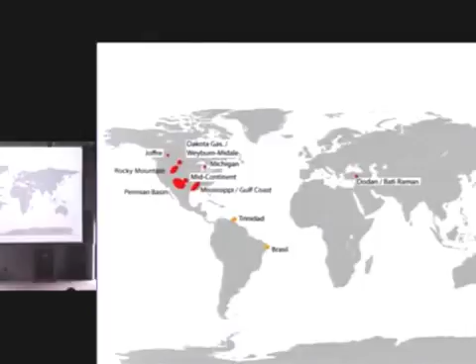You know that when you drill a well in the United States, most people are hoping to strike a few things. You're hoping to strike oil. Here in Pennsylvania, where I'm from, we're in the middle of the Marcellus Shale region, so people are hoping they have natural gas under there, or you might drill wells for water. But there are a few places in the United States that have not just reservoirs of natural CO2, but prolific reservoirs of natural CO2. In fact, in the world, the United States and North America in general has this uncharacteristically large amount of natural CO2.

Most of the reservoirs are surprisingly high in purity. Some of them, such as in LaBarge, are very low purity, but utterly massive in the amount. And because of that, there's a great amount of interest in what to do with all that CO2.

Well, in the United States, we also have a large amount of crude oil. We've been working fields containing underground layers of sandstone or carbonate for decades, primarily in places like West Texas and the Permian Basin, where there are, several thousand feet below the ground, a great deal of crude oil reserves.

And the first way that you try to get this out is by the natural pressure, just from the pressure of the formation and some of the gas that's dissolved in the oil. When you depressurize at the production wells, you get the natural forces to produce it. And then after that, you can inject water into these formations. This can go on for decades - 10, 20, 30, 40, 50 years of water flooding.

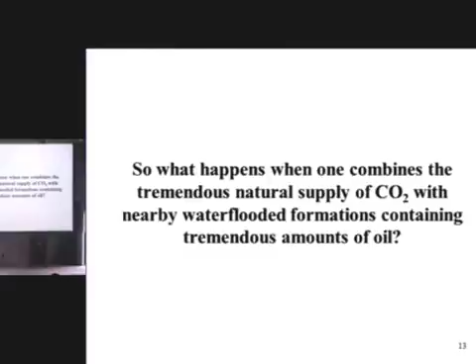There are also, especially in West Texas, large sources. Now, it's called anthropogenic CO2, but just to make it clear, this is actually CO2 from an underground reservoir.

So it's actually made by nature, but it's in a methane-rich fluid. They process natural gas to sell methane, and CO2 is a byproduct. They used to vent the CO2, but some of these gas plants actually now sell it into pipelines.

This is one of the most prosperous and growing areas of the country right now for CO2 enhanced oil recovery. You have the Jackson Dome supply of CO2, supplying CO2 enhanced oil recovery fields in the southeastern part of the United States.

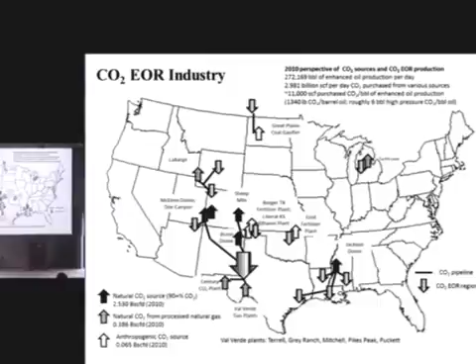Typically, you're told not to put up a lot of text on slides, but you have to violate it once in a while. Some of these numbers, I think, are really important to gain a perspective of this.

Of the 7.6 million barrels of oil produced in this country, about 4% of it, or 285,000, comes from CO2 enhanced oil recovery. 3 billion standard cubic feet of CO2 are injected into the ground every day.

About 11,000 standard cubic feet of CO2 are injected to produce a barrel of oil. If you burn a barrel of oil, it releases 8,000 standard cubic feet. Another way to think about it, 175,000 tons of CO2.

This is the one that really gets everyone's attention. It actually takes 4 or 5 barrels of liquid CO2 to get 1 barrel of oil out. And believe me, the oil companies don't like this. They don't want to use 11,000 standard cubic feet to get out 1 barrel of oil.

Right now, some of them promote that because it makes it look like it actually sequesters more CO2, since you're injecting this much to get out a barrel that releases this much. But believe me, they would like this number to be much, much smaller.

It's a lot of CO2. There's over 3,000 miles of CO2 pipelines in this country. And only 15% of the oil in place is recovered by this process.

Coal-fired power plants emit roughly 30 times as much CO2 as is used by all the CO2 for enhanced oil recovery. And yet only an incredibly small fraction of truly anthropogenic CO2 is used for EOR.

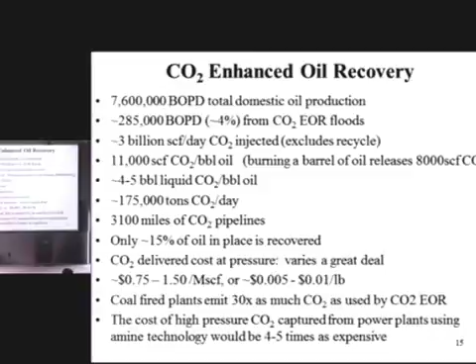So CO2 is doing so well. If there's this big infrastructure with all these sources and nearly 300,000 barrels of oil a day and all of these jobs, then what's the problem? There's a profound problem.

Almost every one of these CO2 enhanced oil recovery fields has major problems getting oil out of the ground. Even though they're economic, they want to be, and they can be, much, much more economic. This is the primary killer for enhanced oil recovery.

The viscosity of CO2 in centipoise, which is the same as millipascal seconds, is roughly 0.05 at enhanced oil recovery conditions. This is temperature, and these are lines of constant pressure. This is about EOR conditions. That means CO2 is roughly 20 times thinner than water.

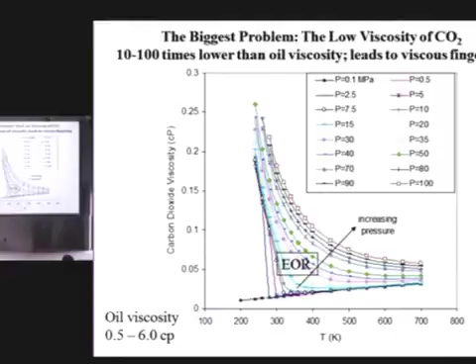And oil viscosity in fields where CO2 is applied ranges from 0.5 to about 5 or 6 centipoise. That means the CO2 is 10 to 100 times thinner than the oil being recovered. And that leads to profound and prolific problems.

So the low viscosity of CO2 increases the mobility ratio. You know, every time you run an equation on a slide, you lose half the audience, right? I think this is my only equation, so please don't be discouraged, and the half of you that just drifted off, please hang in there.

So the mobility ratio looks like this: this is the viscosity of CO2, this is the viscosity of oil. Upstairs, we have the relative permeability of CO2 — if you're not familiar with that term, it's a measure of how easy it is for the fluid to move through the rock. Downstairs, we have the relative permeability of oil. We want the CO2 to be less mobile than the oil, so we want this mobility ratio to be 1 or less — we want it to be small. So back to grade school: how do you make this small? Well, you could make the numerator small, or you could make the denominator big, or you could make the entire thing small. That's all it comes down to.

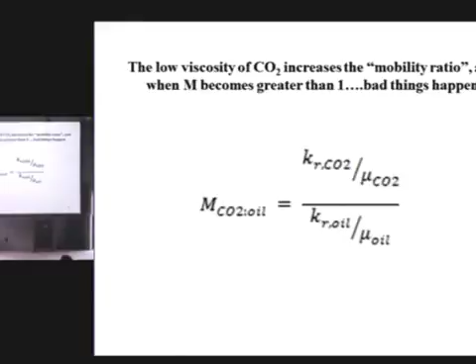The most profound challenge facing CO2 enhanced oil recovery is: can you make the relative permeability smaller? Can you make the viscosity of CO2 bigger? Or can you make this entire lumped term smaller? There's not too much you can do about the oil itself because it's down there in the rock, so you're not going to make much progress attacking that.

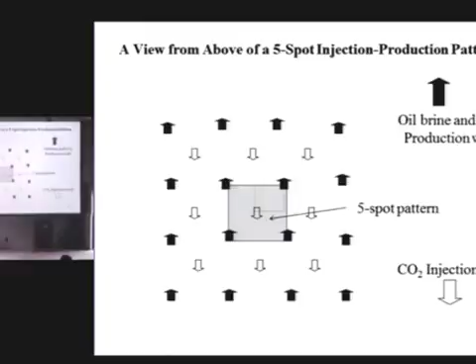So now let's pretend we're in a helicopter flying over West Texas. There are a bunch of wells in this beautiful pattern called a 5-spot pattern. The arrows pointing down are where they inject CO2, and the arrows pointing up are where they produce CO2, oil, and brine. So this is the 5-spot pattern, and what we are particularly interested in is the repeating representative unit of that 5-spot — in essence, a symmetric little pattern.

On this diagram, which is about 50 years old but still conveys the message beautifully, this is the problem — again, we're viewing from above. This is about what happens in most fields right now when you do CO2 enhanced oil recovery. Here's the injection well, where they're injecting CO2; this is that representative pattern, and this is the production well. The CO2 fingers through. This is a snapshot of where the CO2 has progressed when it first breaks through, or when it first starts to flow into the production well.

This is a mobility ratio of 71 — that means the CO2 is roughly 70 times less viscous than the oil, a number that occurs in oil fields today. Do you see this gray area? CO2 is doing a great job getting the oil from that gray area; it's a good solvent because it develops miscibility. The problem is that it hasn't even touched these white areas. So what they need to do is take the CO2 that comes out, re-inject it with new CO2, and just continue to flood this for decades and decades — 10, 20, 30, 40, 50 years.

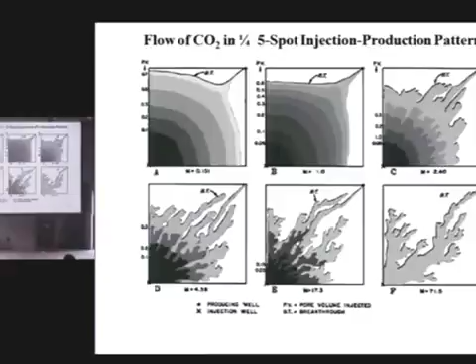Now, if we could make the CO2 less mobile — make it thicker so its viscosity matches the oil's — then this is how the CO2 would flow through the sandstone or carbonate rock. Do you see how smooth and uniform it is? It's just marching through the formation and sweeping it out. If you could go from here to here, it would have an absolutely dramatic, profound, transformational effect. So how can we do that? How can we do that?

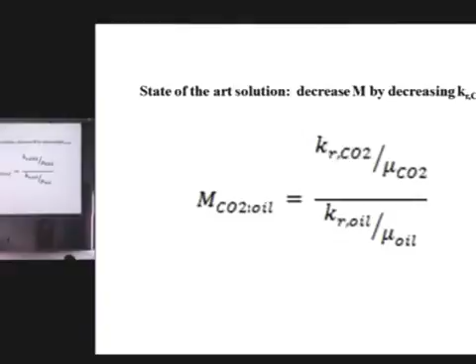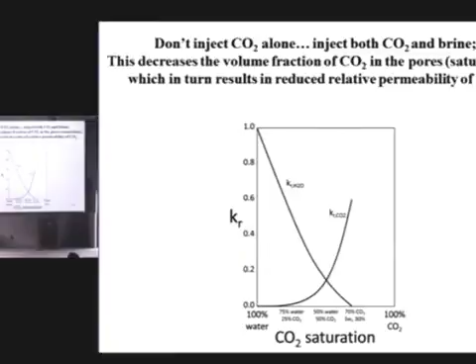But what's the price you pay? You're injecting all this stinking water. They don't want to be injecting water into these wells, they want to be injecting the good solvent. So you're injecting water, you're producing water. It's a nightmare of an operational problem, but it's the best idea they have.

I don't know who has more acronyms, government facilities or the oil industry. It's a really close competition. So what I know about the oil industry, the acronyms are much less accurate.

For instance, they call this WAG. It's water, but it's never water, it's always brine, they never do this with fresh water. And they inject it alternately with gas—it's really not gas, it's supercritical CO2. But WAG just sounds so cool that it's called the WAG process. Everybody loves WAG. WAG is the way to go.

It makes things profitable. The Republicans love it because it produces oil and generates jobs, and the president loves it because it sequesters CO2, even though most of it is natural. Well, we'll forget about that for a while. But it's a clear demonstration that you could sequester CO2. So it's a great technology.

It's thriving. This is how it's done: you inject the CO2, you inject it alternately with brine, you develop a miscible zone that pushes a lot of oil out. And coming out, you have three things. You have oil—it goes into a big tank, you separate it by density, and you sell that.

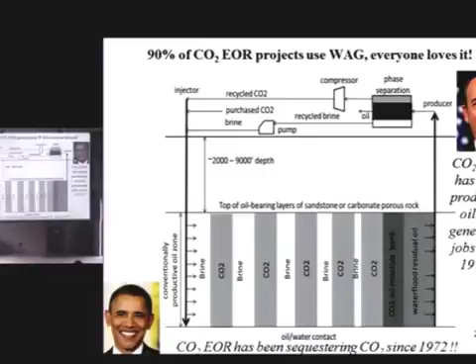You have brine—you just recycle that and re-inject it. And then you have CO2, actually some other gases in there too, but let's just say it's CO2. It gets recompressed and recycled with brand new CO2. That's how the process works.

Even though that process works very well economically—they make profits, it's a thriving industry—it could do so much better. It could do so much better.

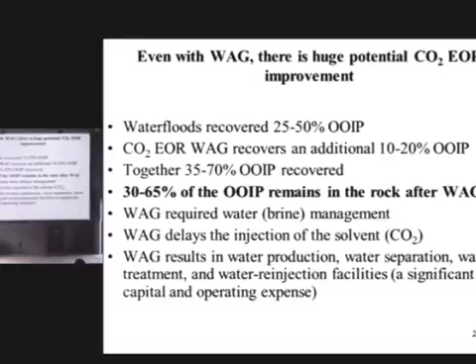After primary floods, water flooding, and even CO2 enhanced oil recovery, CO2 flooding only gets 10 to 15 or 20% at most of the original oil in place. Even after primary recovery, water flooding, and CO2 flooding, you still have one-third to two-thirds of the oil still remaining there, sitting in the rock.

It's so frustrating, and WAG is not the ideal solution. It requires massive water management. When you go to these oil fields, there are people whose whole lives are nothing but managing water—water coming out of wells, they have to treat it a little, redistribute it, re-inject it, separate it in separation wells.

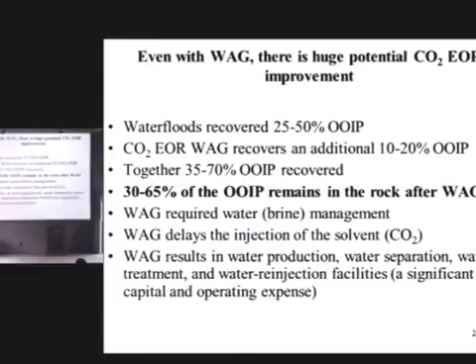WAG delays the injection of the solvent. You're injecting months of water, and the water isn't a solvent at all. And you have a whole bunch of facilities dedicated to it.

This is where one of our research areas comes in. We're trying to thicken CO2, to make it just as viscous as the oil being recovered. If we could do that, I believe we could easily double or triple the oil production rate coming from these enhanced oil recovery projects. That is our goal, and it is really, really difficult.

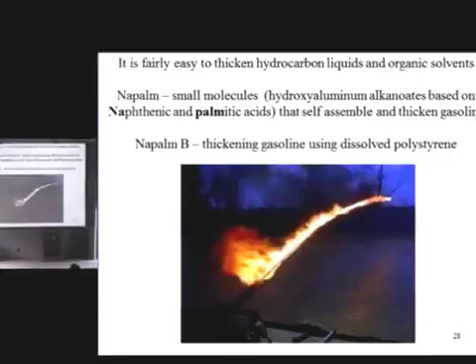This is a picture of a thickened hydrocarbon fluid—napalm, which was weaponized gasoline. When napalm was invented, they tried to thicken it, first with tiny molecules that self-assembled into rod-like macromolecules in solution. It gets its name from naphthenic and palmitic acids—actually the hydroxyaluminum alkanoates of these acids—taking the 'na' and the 'palm' to make napalm.

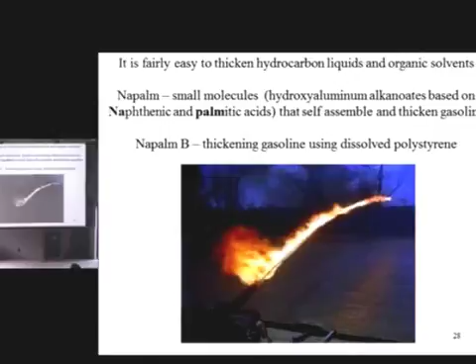After polymers hit their stride, you could simply take polystyrene—a styrofoam cup—put it in gasoline, stir it around, heat it up a little to make it go more quickly, and thicken it. This tells you there are two ways to thicken fluids: either really, really big molecules, or teeny tiny molecules that self-assemble and form long viscosity-enhancing macromolecules.

This is what we're trying to do to CO2. We're trying to make a beautiful, transparent, thermodynamically stable, viscous solution where the CO2 viscosity is the same as the oil. If you read the literature on thickening things, we do not want to make a milky white or opaque gel. This gel is actually a bunch of micron-scale fibers interlocked with the solvent in the pores. That will not flow through a rock.

This can flow through a rock. This cannot. What will happen if you inject this into a piece of sandstone or carbonate rock, the rock will filter out all these fibers. They'll just get stuck on the face of the rock, and it won't work at all.

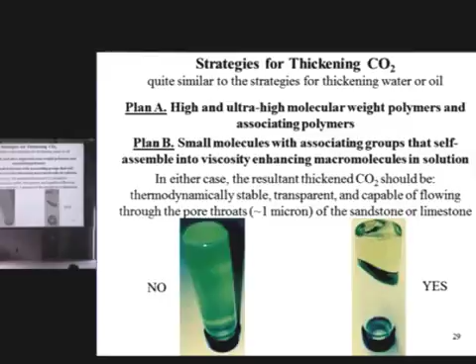So our challenge is a little bit harder than people that make gels in vials, because we have to get whatever viscous solution or gel that we form to flow through a piece of sandstone or limestone.

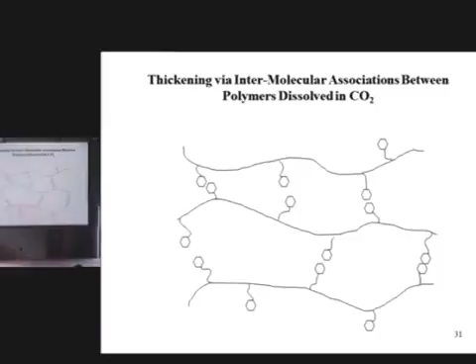We had some success with polymers. Our idea was to make a polymer with CO2-loving parts and associating parts, so that if we got these polymers to go into solution, not only would they start out with a high molecular weight, but these associations with CO2-phobic groups would make a large viscosity-enhancing macromolecule. We were successful. We made the only CO2 thickener that's been identified yet.

It's a copolymer. This monomer is a fluoroacrylate, the most CO2-loving monomer there is. This is styrene. This doesn't like CO2, but it likes to associate through pi-pi stacking because there's a different electron density on the periphery of the benzene ring than there is in the core of the benzene ring. So they sort of stack like this.

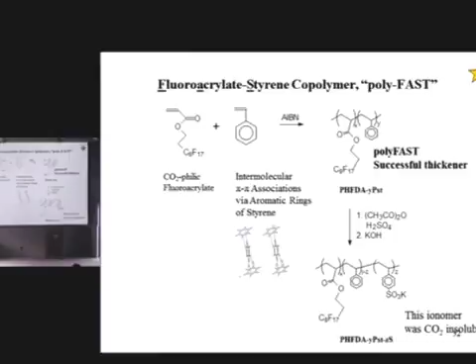When you put this into CO2, you can adjust the CO2 viscosity to the oil viscosity with less than a weight percent. But it's too expensive. Fluoroacrylates cost roughly $50 a pound. We're trying to make a thickener that costs $3, $4, $5, $6 a pound.

So we then tried to make a CO2 thickener using polymers, and we weren't alone. In the early 1990s, there were a whole bunch of groups, mainly interested in chemical engineering applications, studying how CO2 interacted with different chemical functional groups to see which ones were CO2 philic and which ones were CO2 phobic—CO2 loving or CO2 hating.

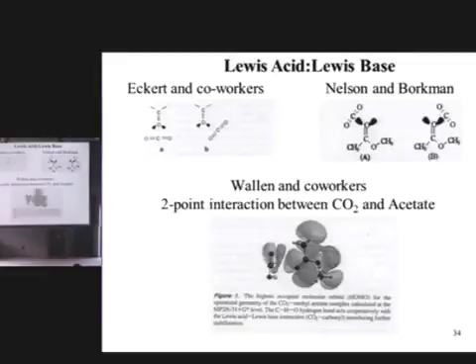What people started noting, even though this is a very simple diagram, it sort of makes the point: the carbon in CO2, even though this is a nonpolar molecule, has a quadrupole moment. Basically what that means is the C is a little bit positive and the oxygens are a little bit negative. So if you have a carbonyl group here, there's a lot of electrons here. This oxygen's a little bit negative, and it likes to hang out with this C, which is a little bit positive. Those kinds of Lewis acid, Lewis base interactions were shown to work.

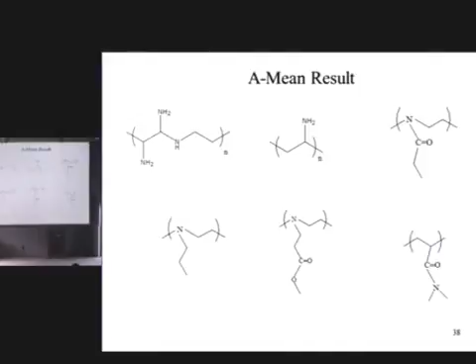So what we started doing was making polymers, and you'll see in the following slides, we have a bunch of polymers. We spent years making polymers—polymers of all sorts of configurations, polymers with all sorts of oxygen, polymers with all sorts of amines, because amines might interact with CO2, polymers with oxygens on the side chain. Everything. It was so frustrating.

Those 4 slides were about 4 years of my life, and that's why I went through them. I'm still in counseling over those. It was one of the most frustrating streaks of research that we ever did.

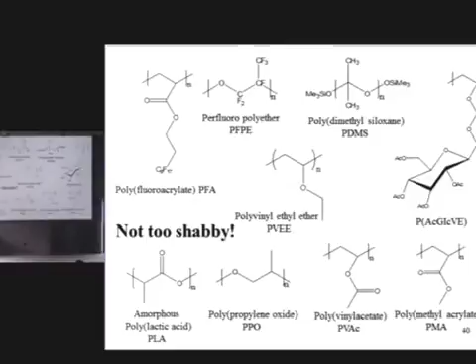This is fluorinated ether. That's not going to work out—this is extraordinarily expensive to make. This is a sugar acetate on the side chain of a polymer. Here's amorphous polylactic acid; that dissolves in CO2. And polyvinyl acetate, polymethyl acrylate.

But you have to be careful. These things are soluble, but they're not that soluble. You need tens of thousands of psi. Oil field operations are nowhere near that. When they do enhanced oil recovery, the pressures are typically 1,500 psi to about 4,500 psi. Every polymer I just showed you requires about 9 to 10,000 or more. With the exception of those expensive fluoroacrylates, all the affordable ones have pressures way, way above oil field pressures.

I'm an experimentalist, and I'm sort of proud of it. And I had to almost go crying to my molecular modeling friend, Karl Johnson at University of Pittsburgh, and apologize for all the cruel things I said about molecular modeling people for decades. I just begged him for help.

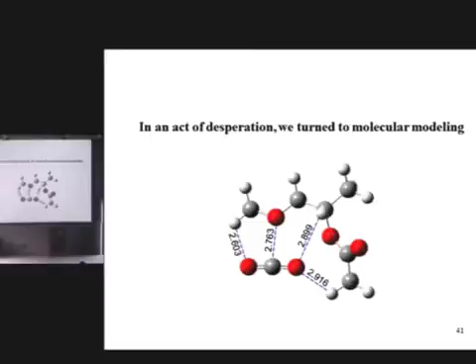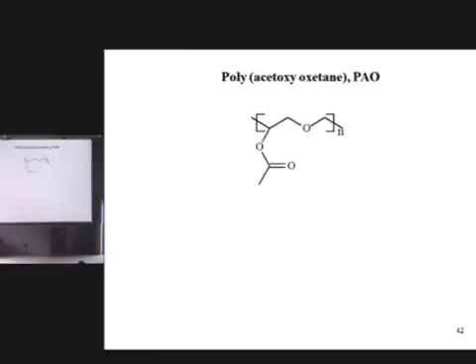I said, there's got to be a CO2 soluble polymer that doesn't have fluorine in it that you could help us make. Well, Karl found out that this polymer, which no one had ever made, actually has more - modeling people also make the best slides. Karl made this slide for me. I like modeling people now.

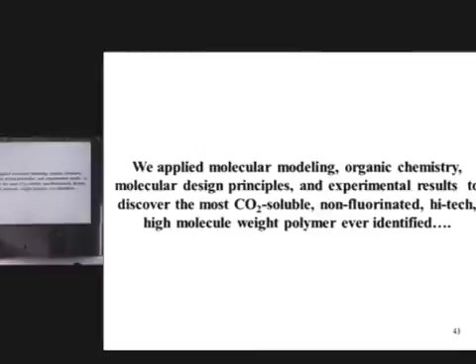Basically what Karl did was he would measure the strength of the interactions and the configurations using ab initio methods, and we found out that this unfortunately wasn't as good as some of the others, and we're still not sure why.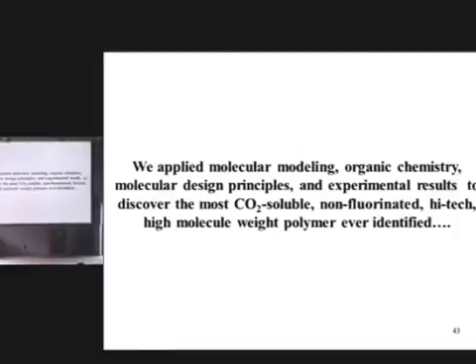So in summary, what I'm about to show you is one slide where we identified, after 6 years of funded work, what the most CO2 soluble, CO2 loving, high-tech, fancy pants polymer that didn't contain fluorine is. And it's Elmer's glue. It's polyvinyl acetate.

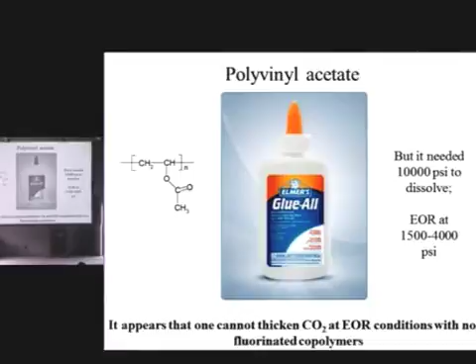It's a $3.50 per pound commodity chemical, and at the end of the day, there is no high molecular weight polymer that's more soluble in CO2 than polyvinyl acetate, but you need about 10,000 psi to dissolve it. So that's way above enhanced oil recovery conditions.

So having exhausted ourselves and the patience of our funding agency, we went to plan B. Every good engineer has a backup plan, and we had an exquisite backup plan. We gave up on polymers, and we turned to those little molecules, the teeny tiny molecules that self-assemble, such as napalm, the example that I gave you for thickening gasoline.

Every small molecule that thickens something, whether we're talking about the thickeners for turning oil into the grease in your garage door, as an example, they all have a part that likes the solvent, so they need to have a CO2 philic segment, and then they have to have a CO2 phobic segment that likes to associate.

Well, from these previous 6 years, we were experts on things that love CO2. So we knew about CO2 philic things, and CO2 phobic things we took from the industry. These are the ideal things that we would like to have for these small molecule thickeners.

Just to give you a ballpark idea, remember we're paying 20 bucks a ton for CO2. So we want to get a thickener that works at about 0.05 weight percent - that's about 1 pound per ton. If CO2 costs $20 a ton and this thickener costs $5, they'd be willing to pay $25 per ton of thickened CO2 if it was as viscous as we're trying to get it.

This is what's really hard. I don't know how many of you have ever made gels with small molecules, but what you typically do is you put the powder in the solvent, and then you have to heat it up to break those bonds and let it dissolve, and then you let it cool to form the gel. It's just like making Jell-O, right?

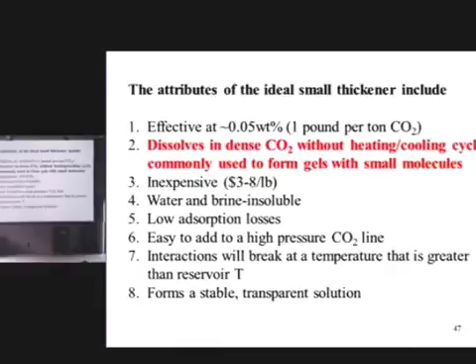So on top of the difficulty of finding a gelling agent, you have to tailor it so you can just stir it without heating it and have it make a gel. That's really hard, and that's what makes this project another thing that makes it so incredibly difficult.

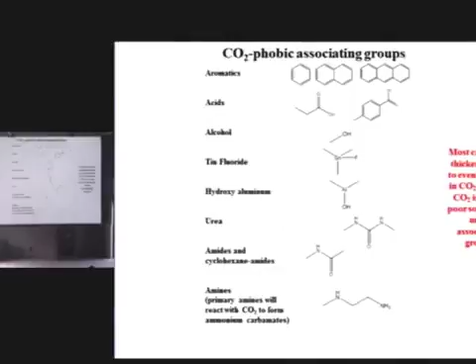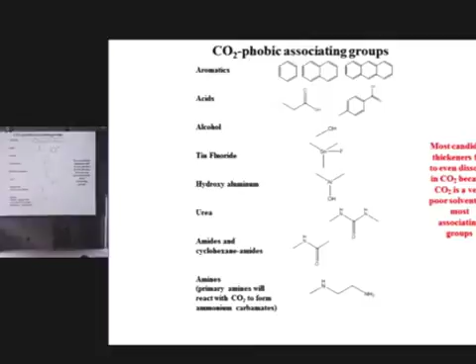Here's the CO2 phobic groups - the same groups I showed you on the previous slide. All we did was look in the literature for things that like to associate. We looked at hundreds of papers of molecules that gel things, and we looked at the features of their structures - these are the chemical groups that like to associate with one another. We took CO2 philic segments and matched them up with CO2 phobic associating groups in different architectures.

We reviewed the literature, and in this cartoon, the stars represent the sticky part. The straight parts represent rigid CO2 philic groups, like short alkyl chains. And the ones that are a little floppy represent things like silicone oil or polypropylene glycols that have a bit more flexibility. There's all these different architectures.

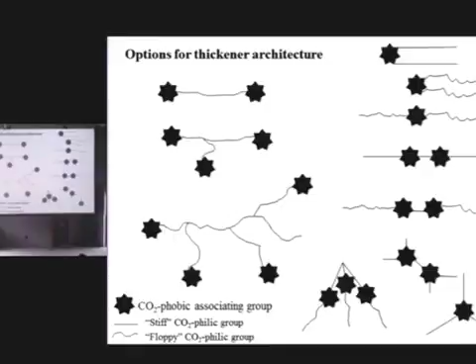So what we're doing right now is exploring all sorts of small molecules. For instance, take a look at these - CO2 phobic, but they associate. This is a short hydrocarbon chain, so those can be CO2 philic. These things thicken hydrocarbons very easily.

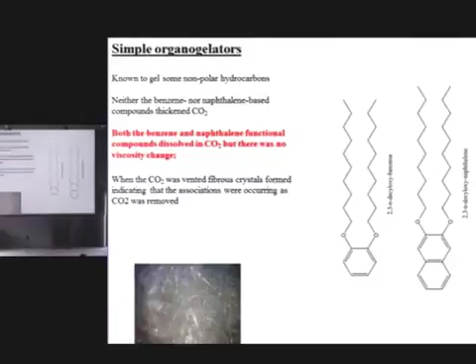In CO2, we found that they were soluble. When they came out of solution - these did go into solution in CO2, but they didn't change the viscosity. When we vented the CO2, they did self-assemble, now that the CO2 was gone, and formed fibers.

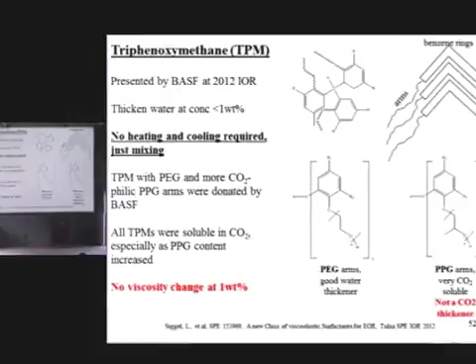So what we did - we worked with BASF, and we took off these polyethylene glycols, which don't like CO2, and we put in polypropylene glycol, which really likes CO2. We got this molecule to dissolve. This was CO2 insoluble before; we did get this to dissolve in CO2, but it didn't self-assemble and thicken.

This is the universal gelator. It's made in Great Britain. They call it universal because this molecule gels more liquids than any other molecule that's ever been made, so they nicknamed it the universal gelator. When I spoke with this person, Dr. Knight in Great Britain, and read his papers - maybe this is why his group doesn't have as many papers as they could.

They were actually gelling wine and beer. I think the graduate students repeated that experiment like 10 times to make sure it worked, but they actually reported gelling wine and different kinds of beers, and also toluene and hexane and things like that. So we made this thing, and it sits like a rock in CO2. So I told him he had to change this to something like galactic universe - CO2 is not in the universe. It sits there like a rock.

These are the associating groups, these 4 hydroxyls. CO2 doesn't have enough solvent strength to dissolve them. We also looked at little molecules - you see this simple little thing here? When I say little, a lot of thickener molecules are teeny tiny, very small.

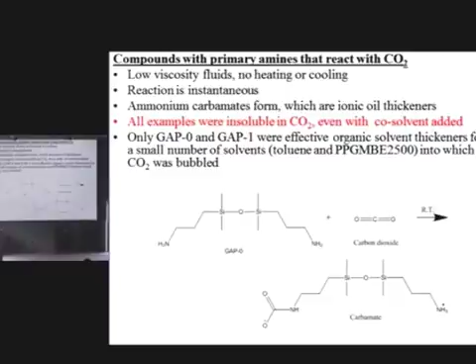This has primary amines. These react with CO2, and you could form an ammonium carbamate - this is positive, this is negative. These molecules can line up in a row. This is an excellent gelator for some organic solvents, but it's utterly insoluble in CO2. CO2 has a real hard time dissolving ionic groups.

So where are we at right now? The polymers - it doesn't look like it's going to happen with polymers. Right now we are 15 months into a 3-year project to find a small molecule thickener for CO2. We're not there yet, and so, since we're such good engineers, we actually came up with a plan C.

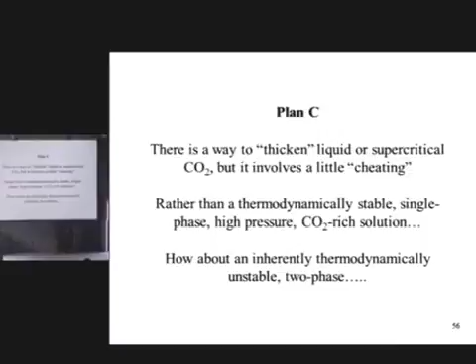So we have a 3rd plan for this one, and that is to make a thermodynamically unstable 2-phase foam. Just think about it - if you go home to the kitchen sink and put soap in your kitchen sink and make these bubbles, this foam, you could sort of consider that to be viscous air. It's like you're scooping up air and holding it in your hand, giving the illusion of it being very viscous.

Now it has its disadvantages, right? If you have a foam in a glass of beer, or if you have a foam in your bathtub or a foam in your sink, you have to do some agitation to make it work.

So somehow you have to agitate these fluids, and then that foam is going to slowly collapse with time. This is not as good a solution as a CO2 thickener, but it's a workable solution.

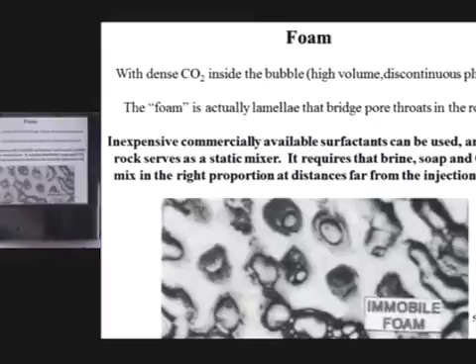This image shows a micron scale porous opening through glass slides. See these bubbles? They're all bubbles of liquid CO2, separated by dark films of water. So what we're going to try to do is actually make CO2 foams in the rock.

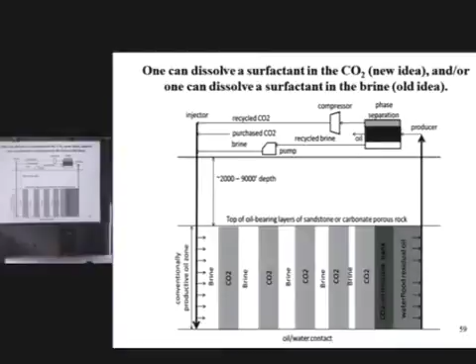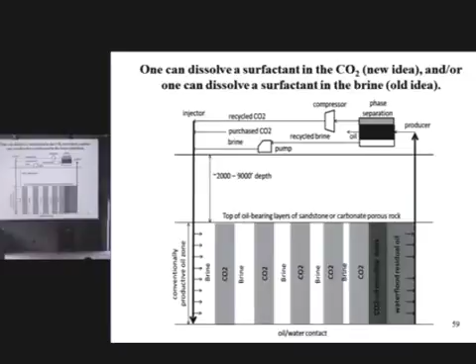Here's the CO2 flood. Remember, right now they inject CO2 and water alternately. So the idea to make a foam is very simple: you put surfactant in the brine, or in the CO2, or in both phases. And what is your mixer? The mixer is actually the rock—the rock is like a static mixer. So you inject soapy water and CO2, or brine and soapy CO2, or put soap in both and see what happens.

You all know this, right? It's easy to put soap into water—we have so many household products. There are thousands of surfactants, but not every surfactant is a great foaming surfactant. This is one of the very best.

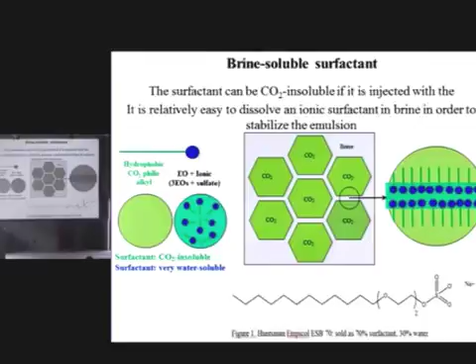This is the one we're actually using in a field trial coming up next month in one of the southern states. It's very soluble in brine, and it goes to the interface and stabilizes it: the water-loving part points out, and the CO2-loving part points in, and you can get some beautiful foams. In both cases, whether it's a CO2-soluble surfactant or a brine-soluble surfactant, both must be more soluble in the brine than the CO2. The only way to stabilize a foam is if the surfactant is very soluble in the continuous phase.

So this one might start out in the CO2, but once it gets into the rock, it actually partitions or dissolves into the brine that's already there and makes a foam.

Eventually, every foam will go back to where you started. What we want is foams that last for hours, days, and weeks—some foams only last literally for seconds.

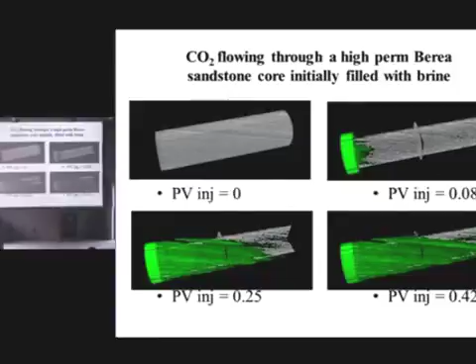Take a look at different amounts of pore volume injected. Do you see where the CO2 is flowing? The CO2 is flowing only through those high perm streaks. See these high perm layers here? See how the CO2 is sort of flowing in layers? That's very poor. This is an illustration of why oil recovery is so low, because it flows preferentially through high permeability paths. This is the same data, just showing the images on top of one another.

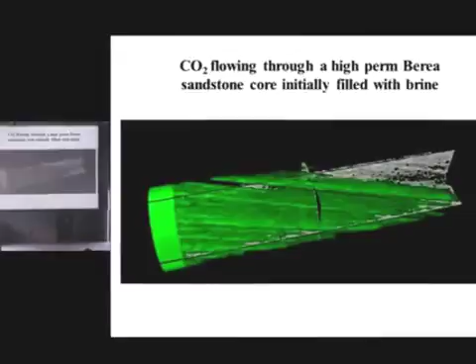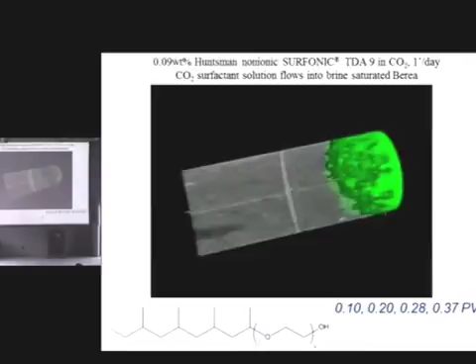Now what we're going to do is show you what happens when we fill this core with brine, and this time we put some surfactant in the CO2. The CO2 again is green. Do you see the difference this time?

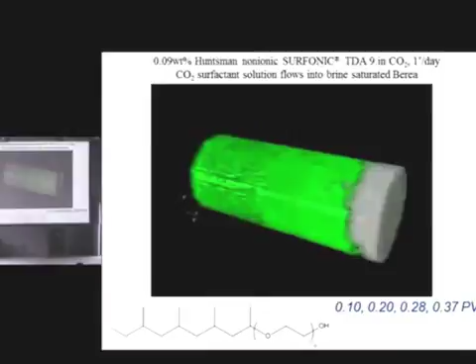This, by the way, is the CO2 distributor at the inlet of the core. You see how the CO2 is pushing like a piston through the core this time? It's not flowing through those little layers again. This is exactly what you want to have happen. This gives the illusion that the CO2 is very, very viscous, and it's completely sweeping through this core, getting everything out of it.

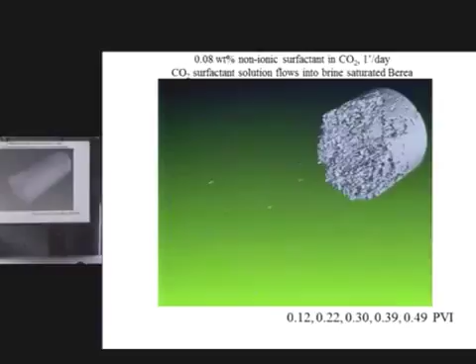Here we have another way to image a different set of data where we made the rock completely invisible, and we color-coded the CO2 to be gray. You see that what it's doing is pushing through here in a piston-like manner, which is exactly what we want.

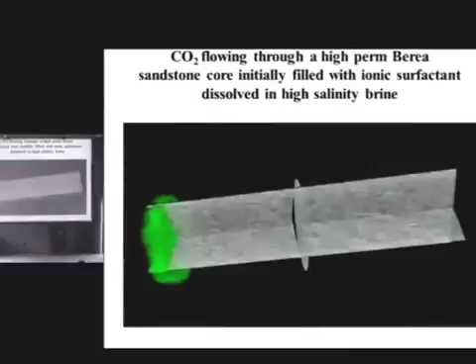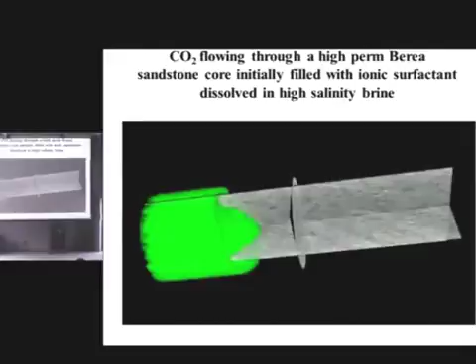This is an image where we put the surfactant in the brine that was originally in the core, and then added pure CO2. This is actually the recipe we're going to use in the field test in Mississippi. We're going to inject this soapy water first, then inject CO2 after it. Once again, it's almost like textbook perfect piston-like displacement of CO2. The biggest enemy we have here is losing surfactant to the rock surface, adsorption.

So this is another example, sort of a textbook example of principles you learn as an undergraduate that come back to haunt you. In this experiment, we take the same core I showed you, and start flooding it with the surfactant solution we're proposing to use, at a concentration of 0.25 weight percent.

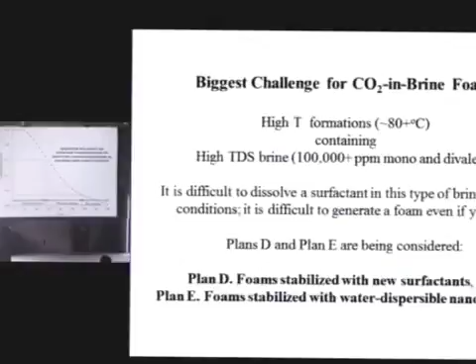What's the biggest challenge for these kind of foams? It's high, and this is reminiscent of conditions for some of these aquifers being considered for sequestration. High salinity and high temperature is a killer. Getting foam floods to work is relatively easy at lower temperatures and low total dissolved solids. But as temperature goes up and as solids go up, it's very difficult.

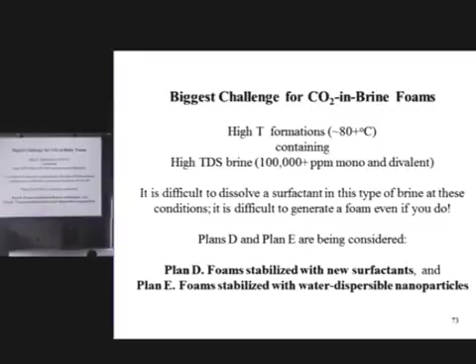So you can either make new surfactants or actually stabilize foams with particles. One of my good acquaintances, somebody who does a lot of work in this area, you're probably familiar with some of his work, Keith Johnston. Keith Johnston is a great individual. He's bright, he's creative, he does a lot of good work in this area.

This is one of his recent ideas, is to tailor a surfactant that starts out as non-ionic, but in the presence of a small amount of carbonic acid that forms when CO2 goes into water, it becomes a cationic surfactant. And Keith and his group are specifically trying to get foams to be stabilized up to 120 C. They basically think that these groups here, these little polyethylene glycol groups, sort of shield the ionic nature of this molecule right here, enabling it to stay in solution more than one would expect.

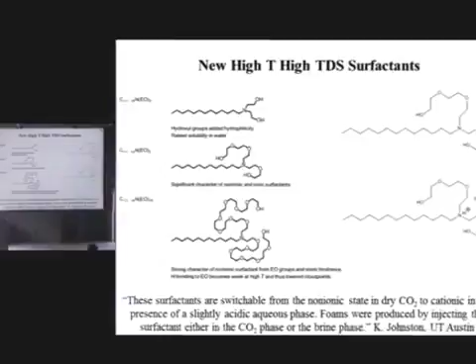You could tailor them by changing their surface properties by fixing different chemical groups to bond covalently with the surface, and you could use them in place of a surfactant. And these things aren't going to have a propensity to adsorb. So they're sort of designed to be injected in the water. So instead of adding surfactant to the water, you actually add nanoparticles to the water.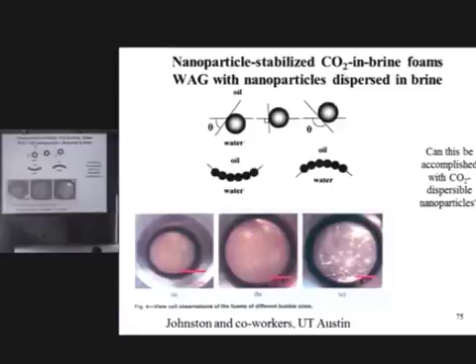You stir it. If you disperse them right, it's transparent. You can't even see that they're there. And remember what I told you? It has to be, if it's transparent, it'll have a good chance of flowing through the rock. So this is another idea that's being considered right now.

So can any of this be applied to sequestration? I don't know. You're probably a better judge of that than me. I am going to tell you one little funny anecdote, though.

In 2006, the National Energy Technology Lab actually put out a call for proposals, and I responded to it. And the topic was, how can you add an additive to the CO2 that's being sequestered to improve the sequestration process? That was the topic. CO2-soluble additives to improve CO2 sequestration.

So I wrote a brilliant proposal, and I never got eviscerated so badly in my life. I actually thought I was going to get corporal punishment for writing this proposal. Every reviewer said, 'Are you out of your mind? I mean, it's bad enough. The economics are bad enough for CO2 sequestration, and you want to add an additive to it. Are you crazy?' And I said to myself, well, then why'd you put out the proposal? I mean, that was the stinking title of the proposal, was to put an additive. And they were good ideas. But boy, did I get spanked on that one.

So let me tell you, what possibilities did I talk about today that might be applicable? Well, when you're sequestering CO2, that's CO2 only going down that injection well, into the deep saline aquifer. So it has to be CO2 soluble or CO2 dispersible. So if, and I don't know if this is relevant at all, if there is a desire in this aquifer to get a better sweep, because you're going to have fingering, right? This viscosity of CO2 is much less than that of brine.

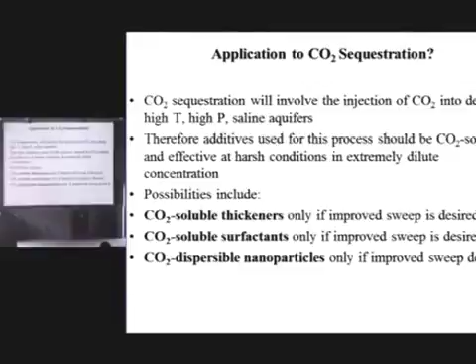This is one of my little side projects that I have an undergraduate working on. Can you actually make nanoparticles that you could disperse in CO2 to stabilize foams? Not dispersing particles in water, but actually stabilizing nanoparticles in CO2 to get nanoparticle stabilized foams.

I don't know if you're aware of this, but recently a patent came out on CO2 soluble additives for plugging leaks. This is always a big concern, right? Plugging leaks, potential leaks, slow leaks. So this patent came out, and it's a short patent. I've written patents before, so I know it's not like a peer-reviewed paper. They put in a few suggestions.

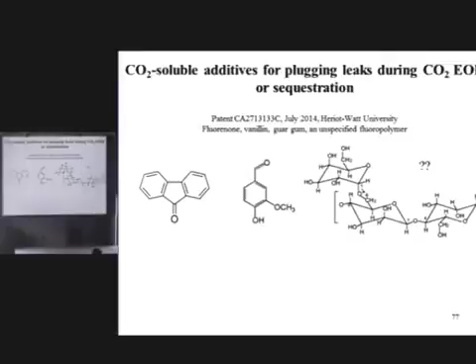Fluorenone, vanillin - these things I could see going into CO2. They actually listed guar gum. There's enough OH groups here to build a house. That guar gum isn't going to go into CO2. That's the definition of CO2 insolubility. But it's just a patent, I think they put it in there. So I'm not sure something like this would work.

During our years, we found some solids that are extraordinarily CO2 soluble. Tert-butylated aromatics such as tritert-butylbenzene, tritert-butylphenol, ditert-butylphenols, incredibly CO2 soluble. And sugar acetates, glucose pentaacetate, galactose pentaacetate, are actually edible - it's a seasoning, a sort of bitter seasoning for food. So you could even put edible additives in the CO2.

Maybe that'll help the proposal get funded. I don't know. But there are indeed a family of compounds where, when the CO2 depressurizes, the solid will come out. Is that an economically viable thing to consider? Maybe or maybe not. I guess the point I want to make is from our work, we have a whole family of small molecules that are solids, highly CO2 soluble, and could be used for this application.

One that's very strange, and you probably never thought of it - I know I never thought of it until I was approached with this problem - is to actually try to find a drag-reducing agent for CO2. In this country right now, there's 3,100 miles of CO2 pipelines. And if CO2 sequestration ever gets put in place, there's going to be a lot more. Now, whenever you have fluids flowing through a pipe, there's frictional losses, even for CO2.

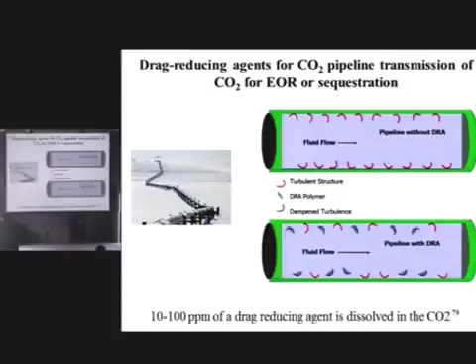You have to remember, whatever that compound is, you're not getting it back out. There's no way to recover it, so it's going to end up going down the hole, whether for EOR or sequestration. We actually did a test of this - I did a test of a drag-reducing agent at a field this year. We took a polymer in solution, a solvent.

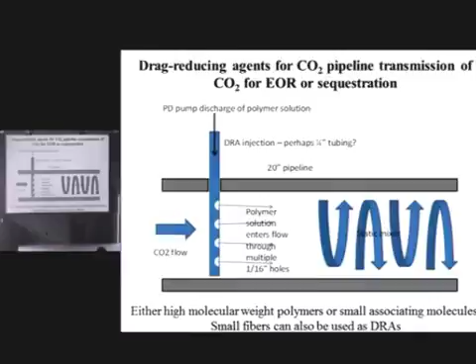We took a polymer solution, pumped it using a pump into a piece of tubing that had multiple little holes drilled into it. We went through a static mixer, and we actually had a beautiful distribution of this polymer in the CO2, and it was a complete failure. But we tried. We didn't get any drag reduction because the molecular weight of our polymer was too low.

So where do things look like they're going in the future? CO2 enhanced oil recovery, it is here to stay. It's going to be here for multiple decades, in fact for centuries. Whether or not CO2 sequestration happens, CO2 EOR is just finding its footing.

There's about 135 projects going on right now. Despite that, the thing I wanted to convey to you today is there's a host of ways to improve this process. The people that run these fields are begging for ideas and solutions, because the problems caused by the low viscosity of CO2 aren't minor, they are profound.

It has a profound negative effect on the performance. So how can you thicken CO2? That would be important. We didn't talk about this today, but layered reservoirs - you folks here have much more geologic experience and expertise than I do. But I think we all know it isn't just one layer of homogeneous rock. There are these layers - some have no oil, but they're so permeable that so much CO2 gets sucked up by them. They need chemists and chemical engineers to figure out how to make gels that can go into that layer, form a gel, and stay there. There are a lot of gels formed like that already, but they could use better ones, especially for a CO2 environment.

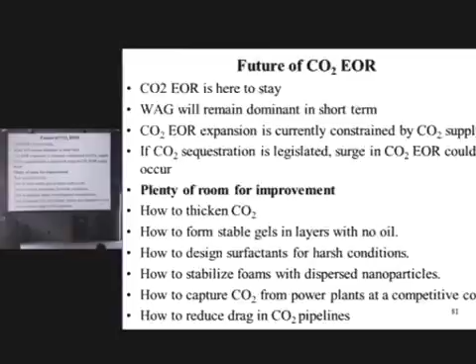How can you make surfactants that work at harsh conditions? How can you stabilize foams with nanoparticles? I do have several projects in CO2 capture - how can you get CO2 capture down to more like $40 a ton or $30 a ton? Just something to push it towards the edge of economic attractiveness without any government intervention for enhanced oil recovery operators. And finally, perhaps how to reduce the drag in these pipelines.

I want to thank all the people that so patiently funded and supported this work over the years - ARPA-E, the National Energy Technology Laboratory, some older groups that no longer exist under the Department of Energy, the National Science Foundation, some small companies and some large ones. Right now we're receiving a lot of moral support, not any funding, from oil companies. They send us cores, they send us fluids, and to their credit, Denbury has actually given us access to some of their injection wells and pipelines to test some of these ideas. That's a very significant contribution they're making to our project.

I put John Heller and Cyrus Arani up here. John Heller passed away - he was from New Mexico Tech. I think there's at least one person here who went to New Mexico Tech. Is that right? Any New Mexico Tech alum? Well, I don't know if you ever met John Heller. He was one of the first people I knew when I was very young - I had long, glowing blonde hair, I was actually mistaken commonly for Brad Pitt. But when I was really young, John Heller was the first person I met who encouraged young people not to just buy chemicals off the shelf and stick them in the cell to see if it worked, but to actually do molecular design, to tailor things for CO2. He was a pioneer in that area - the first one that tried to thicken CO2.

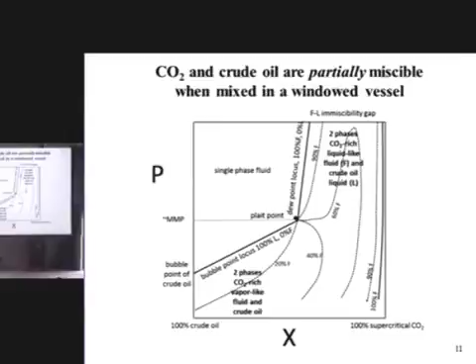Because what happens is, if you inject CO2, on this ternary diagram, the injected fluid is here at this part of the triangle, and here we have heavy hydrocarbons and lighter hydrocarbons. This is a very simplistic model, but it actually represents what happens very well. Your reservoir oil is a mixture of heavy and lighter hydrocarbons - you may think of this as C1 up to C25 or C30, and this is C30 and higher.

So here's the reservoir oil, here's the CO2 that you're injecting. This diagram is at one temperature and one pressure. So you see that if you mix the two, if the CO2 mixes with the oil, the mixture is somewhere on this line. And there's this huge two-phase region here.

So once again, it appears like it's not going to mix - it's going to be immiscible. But what happens is, if you enter - this is like being back in your sophomore year of thermo - if you're in the two-phase region, this is a tie line. This is the CO2-rich phase, and this is the oil-rich phase. Now you see the CO2-rich phase has a slightly different composition - it's not pure CO2 anymore, but it's following this path. And then this mixes with the oil, and the mixture might be on this tie line.

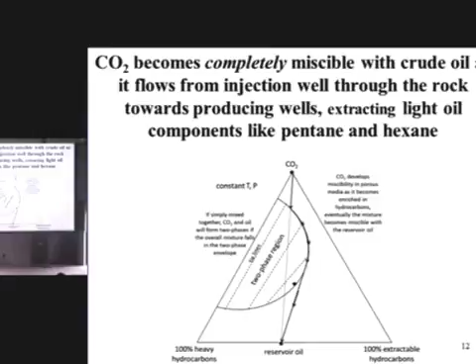And it splits into two phases. North America in general has this uncharacteristically large amount of natural CO2. Most of the reservoirs are surprisingly high in purity. Some of them, such as in LaBarge, are very low purity but utterly massive in amount. Because of that, there's a great amount of interest in what to do with all that CO2.

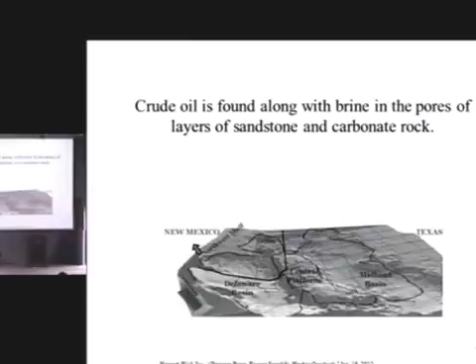Well, in the United States, we also have a large amount of crude oil. We've been working fields containing underground layers of sandstone or carbonate for decades, primarily in places like West Texas and the Permian Basin, where there are, several thousand feet below the ground, a great deal of crude oil reserves. The first way that you try to get this out is by the natural pressure, just from the pressure of the formation and some of the gas that's dissolved in the oil. When you depressurize at the production wells, you get the natural forces to produce it.

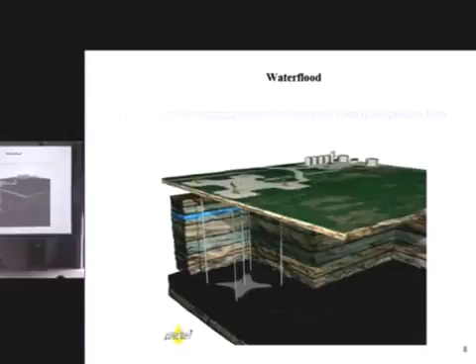And then after that, you can inject water into these formations. This can go on for decades - 10, 20, 30, 40, 50 years of water flooding. But even after all those decades of primary and secondary recovery, usually much more than half the oil remains in place. Here you see a schematic from this company that shows water coming down into this underground layer of sandstone, being injected into an injection well, and proceeding to push and displace the oil towards these four production wells around it.

Mainly, most of my work deals with CO2 enhanced oil recovery, and perhaps as we go through this talk you might see some possible applications to the fine work in sequestration that goes on here. So another title that you might envision for this talk, at least the way that I think about it, is this: what in the world can you do with chemistry and chemical engineering as applied to petroleum engineering? And I found out from being in a department that has both of them that the answer is actually quite a bit.

When I first started in my career, there were a lot of people that sort of said petroleum engineering is not a very exciting place or a very challenging place, and chemistry and chemical engineering is a lot more fun. But actually there's a great amount of excellent work that goes on in petroleum engineering, and it can benefit from a lot of chemistry, chemical engineering, and physics. I think the interface between the two is really an exciting place to be working at.

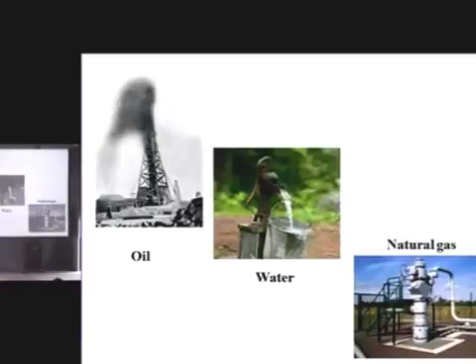You know that when you drill a well in the United States, most people are hoping to strike a few things, right? You're hoping to strike oil. Here in Pennsylvania, where I'm from, we're in the middle of the Marcellus Shale region, so people are hoping that they have natural gas under there, or you might drill wells for water.

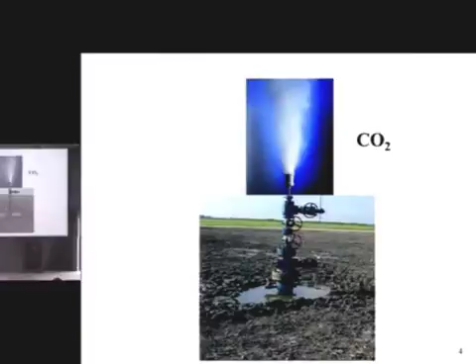But there are a few places in the United States that have not just reservoirs of natural CO2, but prolific reservoirs of natural CO2. In fact, in the world, United...